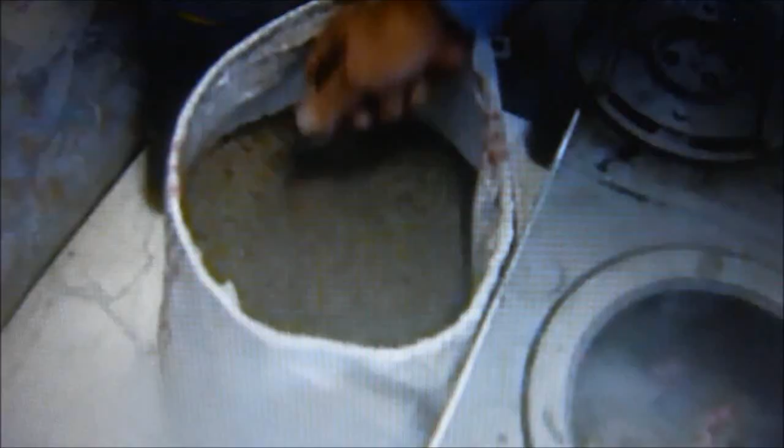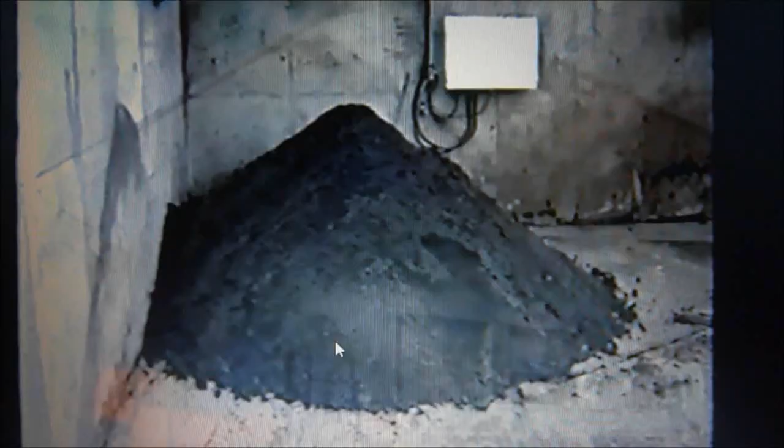MSW as well as sludge. This company is no longer in the experimental stage. It is now commercial. And my name is Bill Doble. This is the output of the sludge that's brought into the system. This is what you get in powdered form.

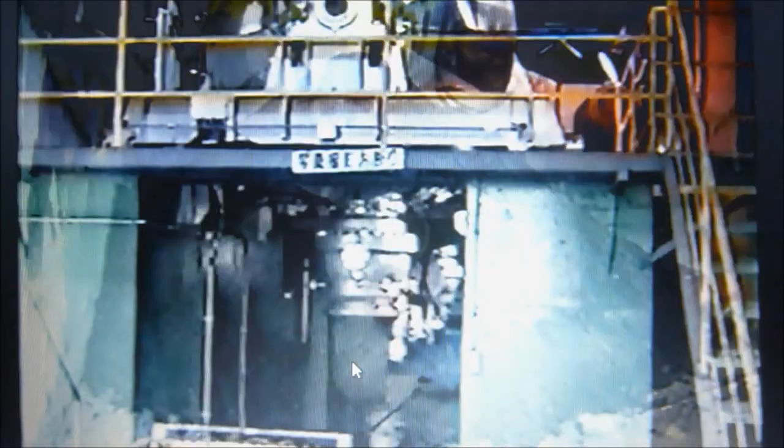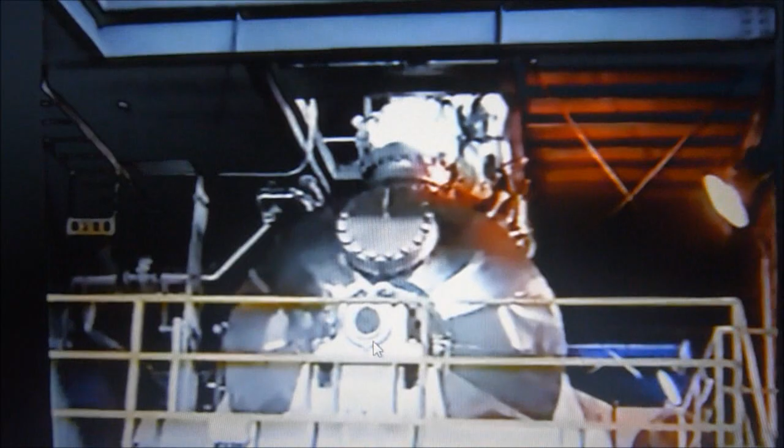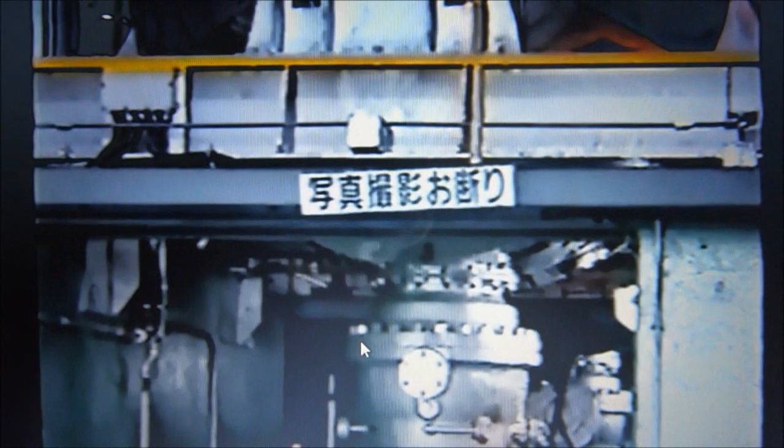This is an amazing technology which we will be bringing into the United States. This is the actual MMCS machine, and this will be in operation momentarily. We'll be able to observe. The footprint on this is extremely small, as you can see from this video. This could be installed in a building of approximately 2,200 square feet, so the footprint is very, very small.

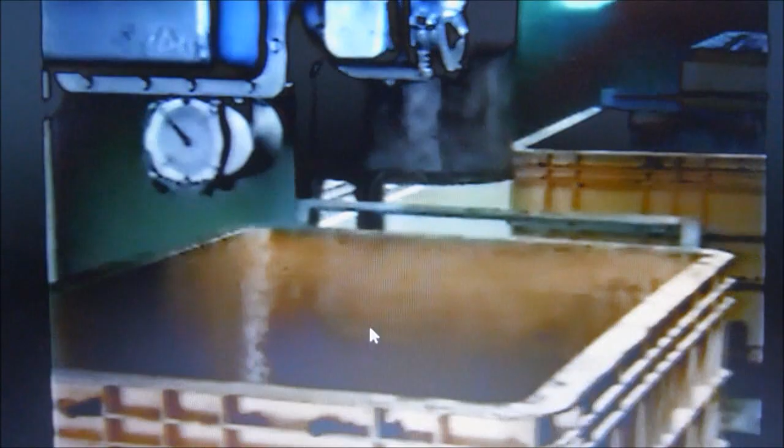This is a close-up of the unit where you have the output, which we will record in a little while. The output falls right out of this cylinder into the bins. This is one of the controls. There are two controlling the system. Here's a crane which is going to be lifting up the garbage that you're looking at into the hopper of the system for processing. We shall be looking at that in a little while also.

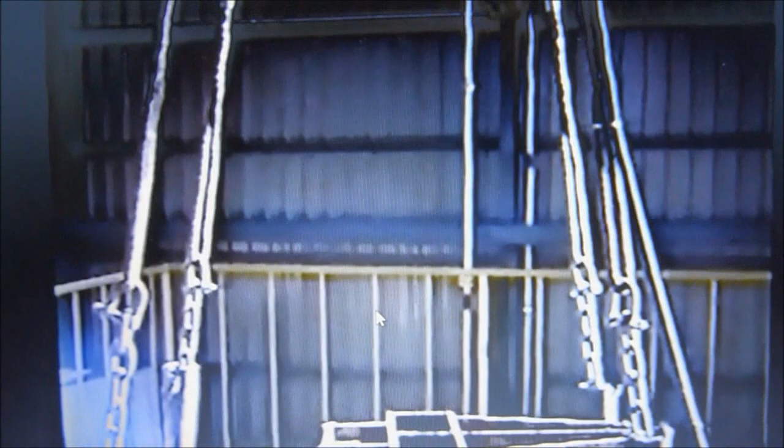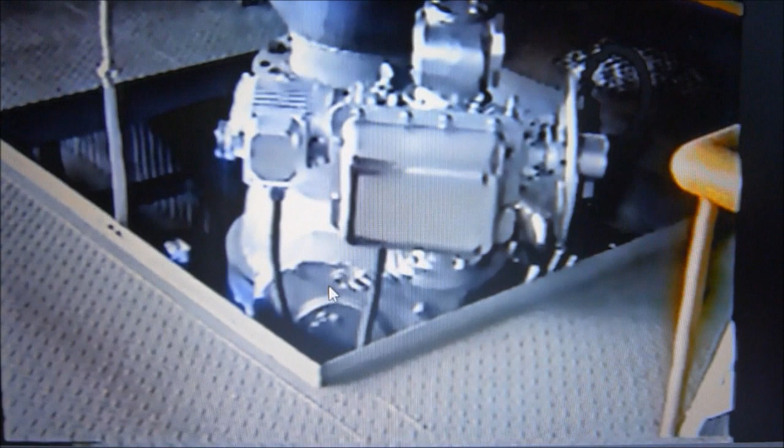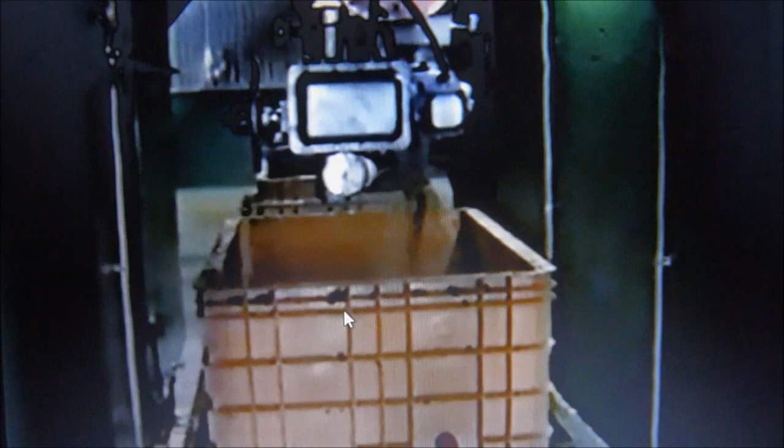This is the bottom of the hopper, and the bottom of this hopper will be the extraction, or that is the byproduct. This is the hopper where the feedstock will be fed in, and this is steam output. Okay, and the steam that's pulled out of this system goes and it's used for processing. As you can see now, this is the sludge coming down with water. There goes the sludge out of the system.

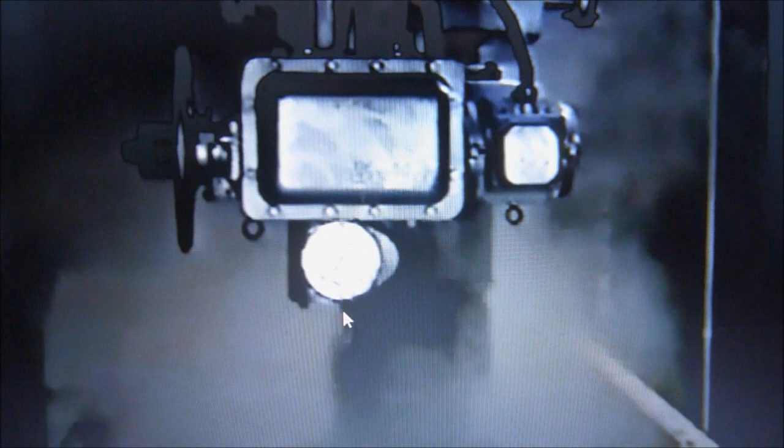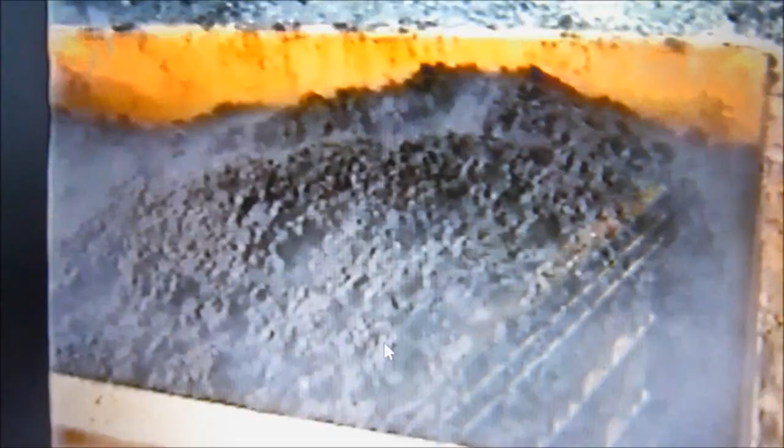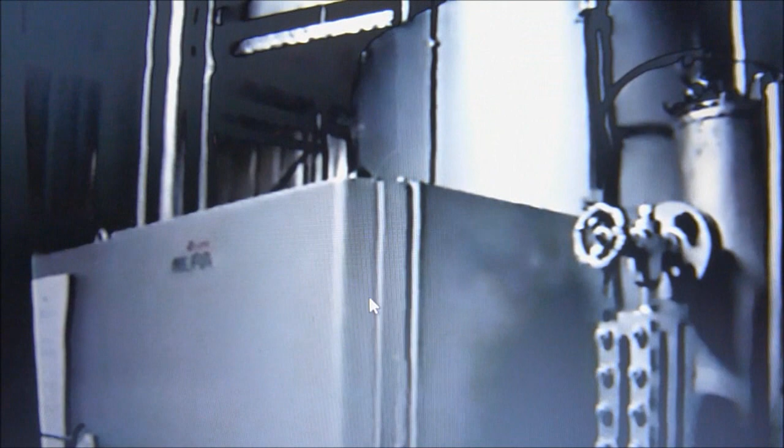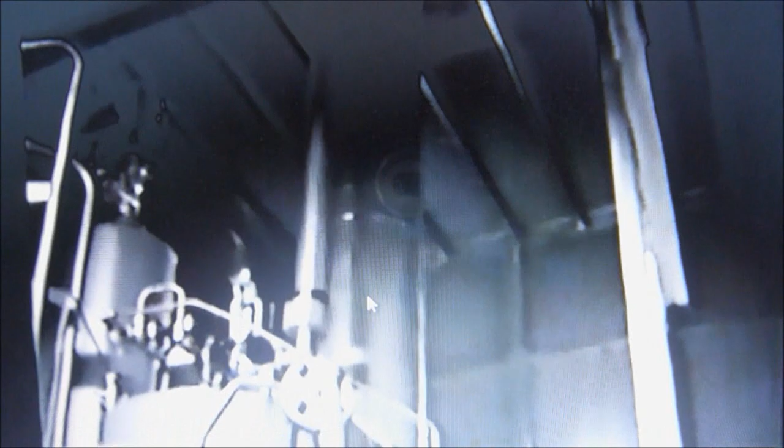And this is the process, the termination of the process right now. So sitting out here, you can see that within a 24-hour period, this will be totally dried. This is part of the system being the boiler that produces steam that we saw earlier. As I indicated, the footprint for this entire operation is relatively small. If you were going to use an incinerator, it'll take you 10, 15, 20 times the footprint. But of course we all know that incinerators are no longer the way to go.

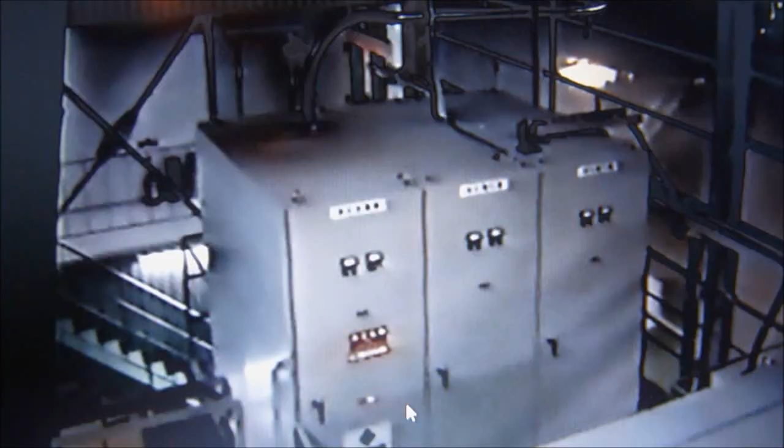This is the control room. That's all you would need for this. Further showing you the simplicity of the system. This is just another angle of the same room. Supplying all the power required for the entire operation. There again, another angle with the hopper. There are two in this particular site.

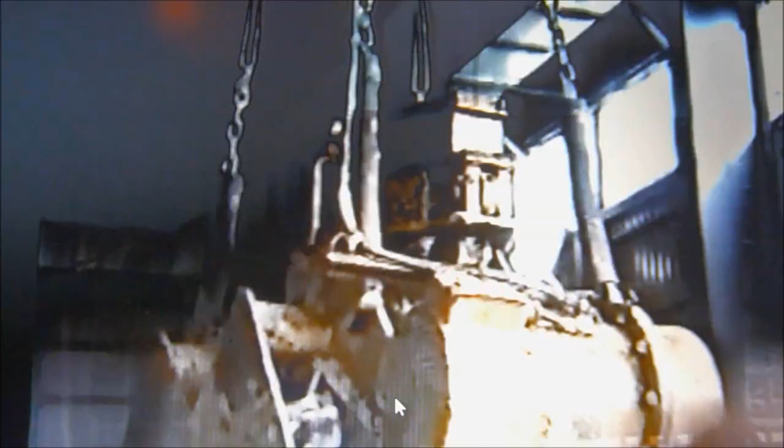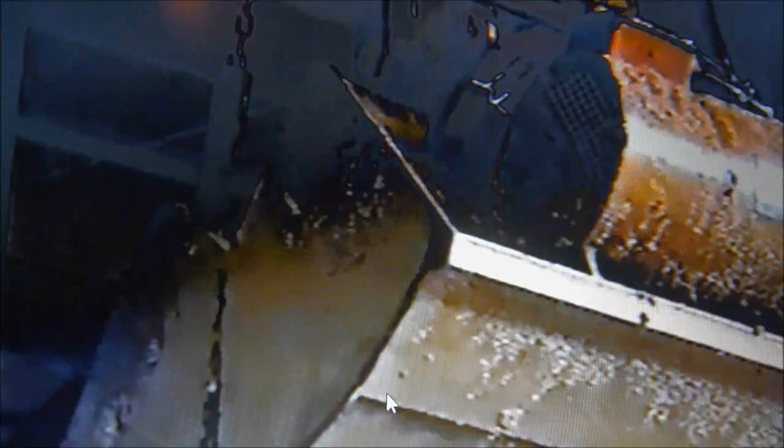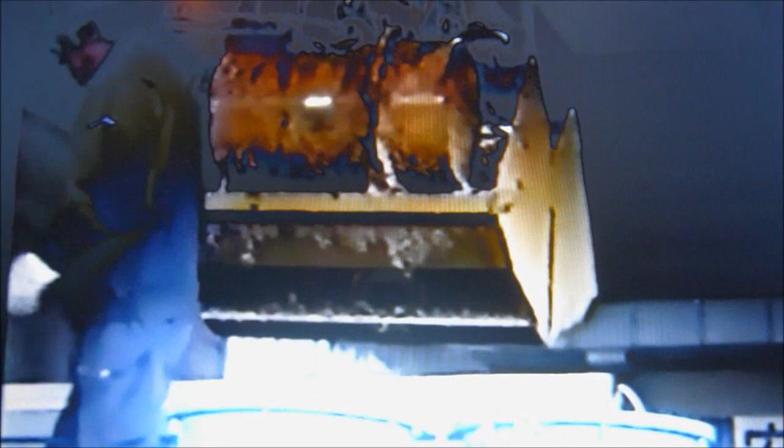This came from a shopping store. This came from a shopping center. It's all garbage. This will be now put into the system, into the hopper for processing. The output of this will also be sludge. This will be utilized for fuel. So it should be mixed with coal after treatment. You'll see the garbage being dumped into the hopper. There goes your garbage.

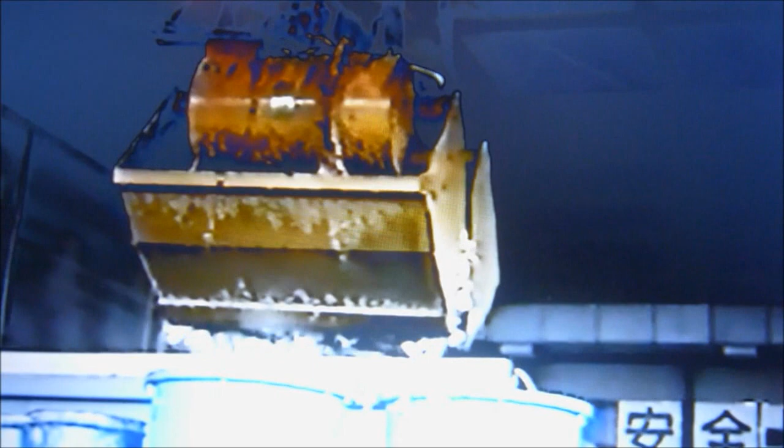Now, doesn't this make more sense, putting garbage into a hopper to be utilized for fuel, fertilizer, than putting it into the earth? I think that makes sense. Process it. Don't put it into the earth. And of course, there is no pre-treatment for that garbage. It was just put in the hopper.

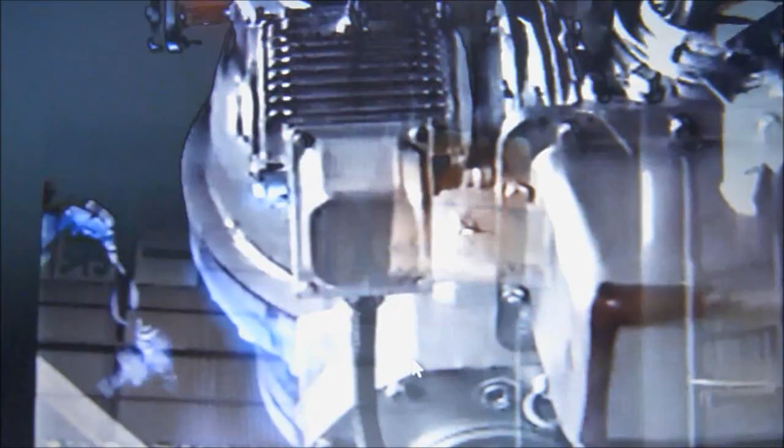This is the valve of this unit, and this is hooked up, as you can see, to the hopper. Can you believe this piece of equipment is what does it all? And look how clean. And now steam is coming. You hear the sound of steam coming. Okay, now the steam is coming. Look at this piece of equipment.

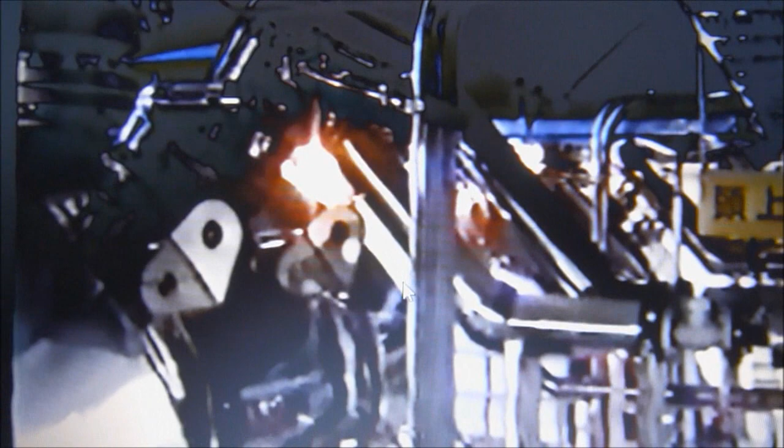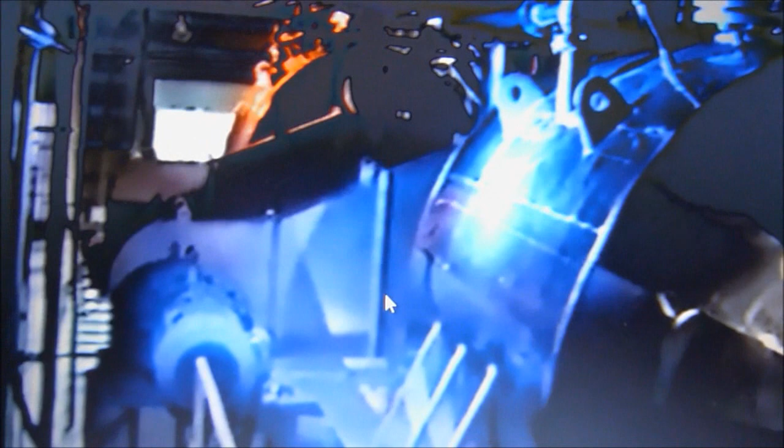So all that's required to process 200 tons a day of New York City garbage, MSW, all we require would be 4 of these. Right now there is 1, and you can see the other one further up. There are 2. So bear in mind, 4 of these units in the same size building will process 200 tons a day of New York City garbage. And look how clean it is. They just wipe the floor down with water.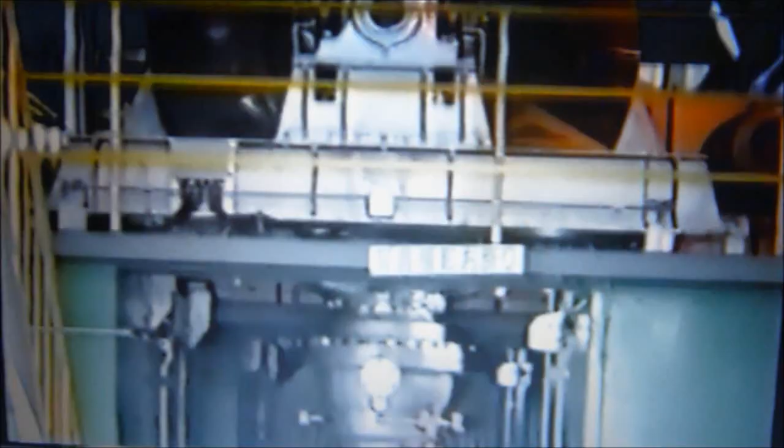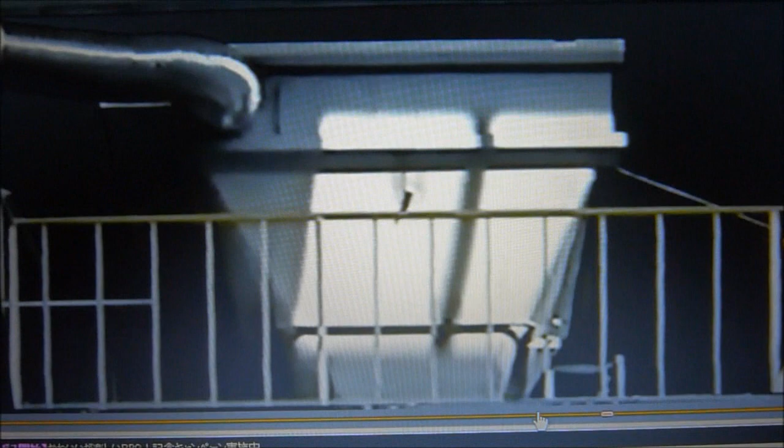And that is the hopper where it is put into. This unit can also be designed where the hopper will be at ground level. Everything will be below the ground at the tipping floor, so the garbage or the MSW as it comes in will be leveled with this particular hopper and be working below ground.

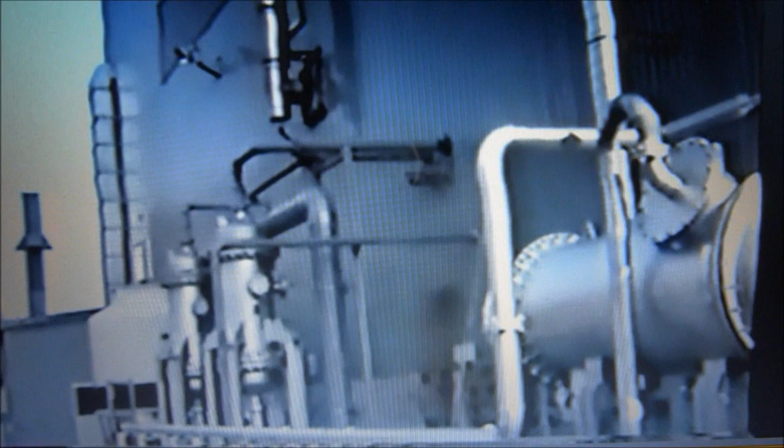The steam extracted from the vessel comes from this condenser to become water, and the released heat will be utilized here for melting snow in the winter season. This is the usage of the heat. Then the condensed water containing a fertilizer element will be supplied into the vessel again. So there is no exhaust water from that plant. And as we're all standing out here, there is no odor at all.

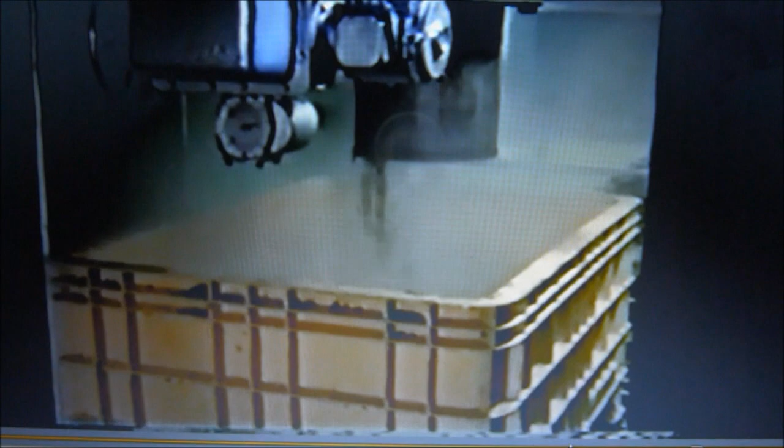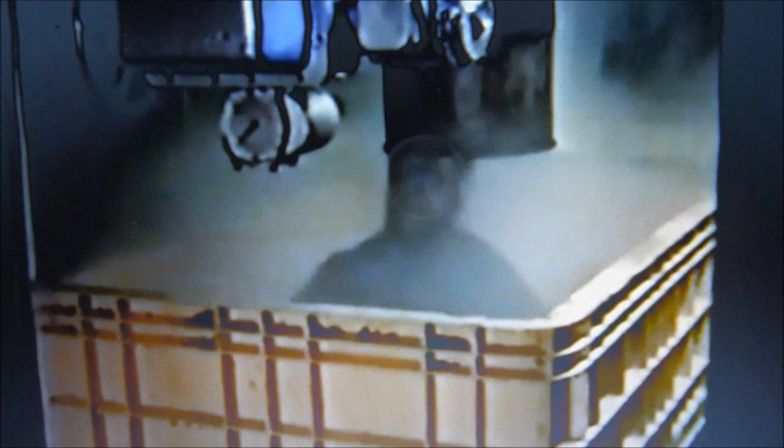We are now preparing for the output. Not sludge, I stand to be corrected. This is the output of the mixed garbage. This is not sludge, just the output of the garbage that you saw previously put into the hopper. It's an amazing technology. This was all the garbage you saw previously.

Just think about it. This is not going to a landfill. And the batch that you saw going in only took 30 minutes for processing, and this is what you have. You must agree that this is truly amazing. And as I indicated earlier, this is taking place in Rumoi, Japan.